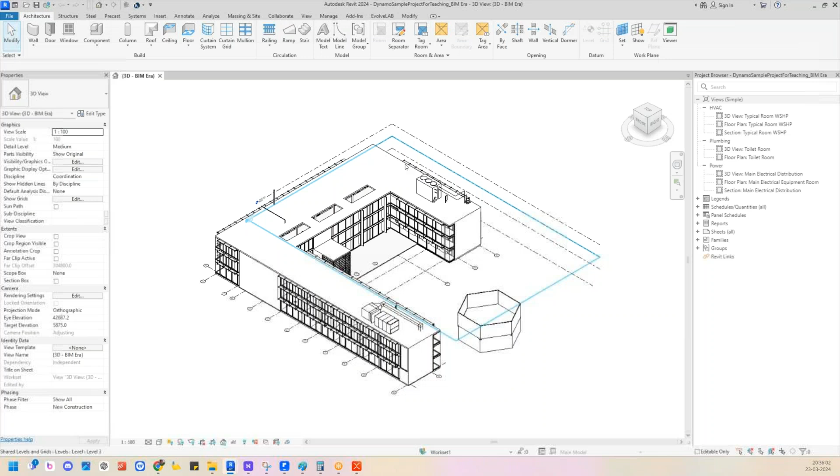Understand? So the first concept is called data types. What do you mean by data type? If I want to play with something—for example, this is a Dynamo interface, I hope everyone knows it. When I'm playing with a model, for example, if I have a line, let's say I have a line, I have a line here.

So I have some lines, 10 lines or 100 lines or 1,000 lines, which I have imported from AutoCAD, or someone, the engineer has drawn some lines on Revit itself, and you want to convert that into trays and ducts, taking that line as a reference. So you take this line as a reference, and convert it into the cable tray by giving some offset, drawing a duct next to it by leaving some space, like 150mm or 250mm or 300mm, depends.

So on the same cable tray, I want to create conduits. For example, I have a duct, and next to the duct, or down to the duct, I need pipes, whatever it is. So offset is a number. So if I want to create a duplicate, that is again a line, a line, a number.

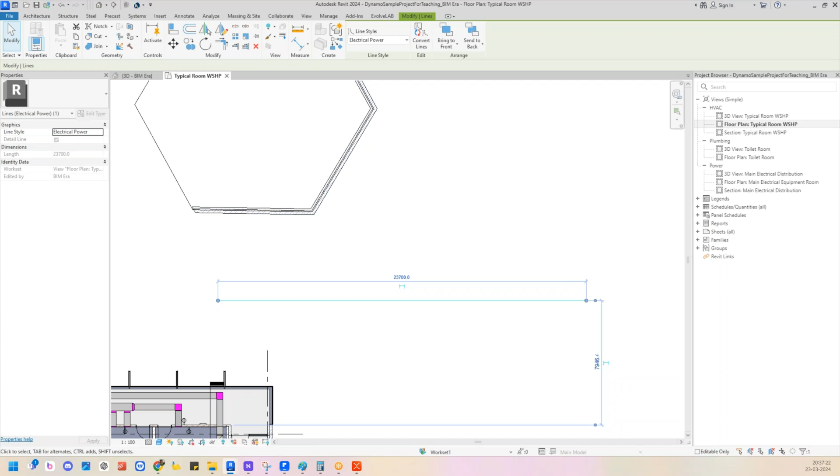If I want to control the wall properties, I want to control the height of a wall, I want to change the level of this particular wall, I want to change the cross section from vertical to slanted. So for every parameter, it has its own values. I want to change those values.

So from the beginning, from day one till the end of our training, and after the training, the way you implement, everything depends on the values. The value I want to play with, I want to play with this value, I want to play with this value.

I want to find out the walls which are slanted, with an angle of 45 degrees, or with an angle like 15 degrees. I want to see such walls in my model. How do you do that? So everything to create a task, to create an action, to play with an action, to extract some information, we need the data.

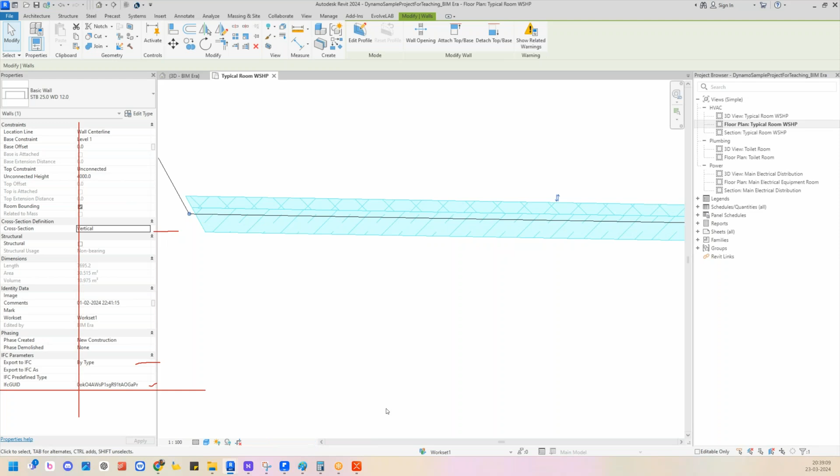Someone texted me a question just out of curiosity, which tool you're using for this mind map. This is Xmind. Xmind.

Vishak, can you see the screen now? I hope it's clear to you. Can you? No, I'm not still able to see the screen. You are not able to see. Hello? Let me share it again. I think it's my problem. Can you see the screen now? Just check. Not yet. I think it's my problem, there's a glitch on my side. Okay, do one thing, join from mobile as well. Join from the mobile. Yeah, I just rejoin. Okay, let's go. Okay, so yeah, I just have to rejoin.

Okay, great. So we have different data coming from different forms. Okay, so we will be calling that data types, and the types are in different ways. Let me show you.

The first one is like a number, and the second one is like a text, and the third one is like saying yes or no. Okay, if you have any questions, the data will nod its head, yes or no, yes no no no, yes or no.

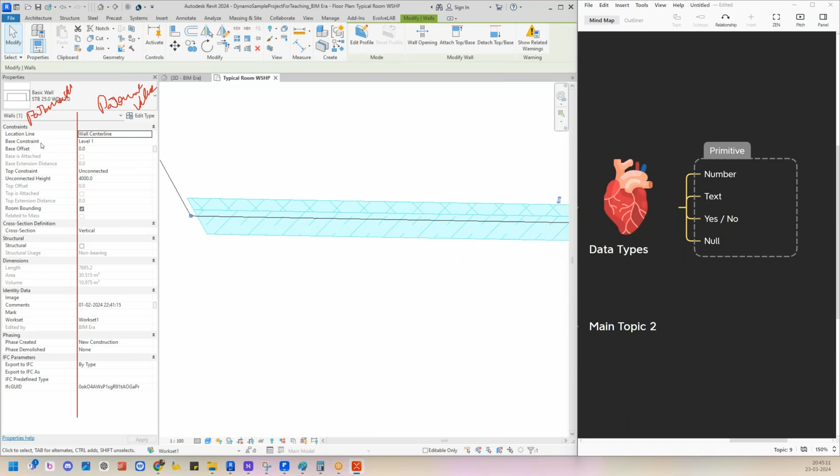So I'm having a cup. I can keep coffee in it, I can put coffee in it, I can put money in it, I can put some alcohol in it, whatever it is. So whatever you keep, different data types are considered. Here the location line is something different, base constraint is something different, and base offset is something different. So how do you understand it?

How do you understand that? Okay, just a second. I'm so sorry, okay, so let me see.

For example, if I want to control this wall height, let me change this number to 4,200. So I'm doing it manually. If you want to play with multiple walls, if you want to convert multiple walls, then I'll right click and select all instances.

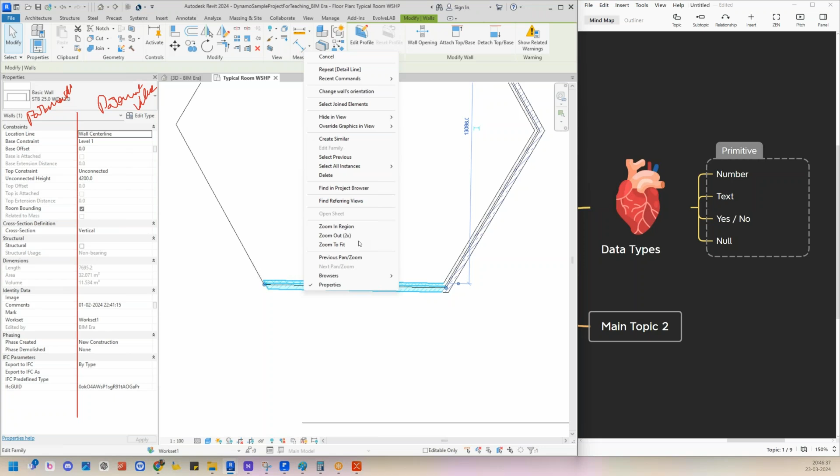If I want to play with visible in view, this is called a filter. You don't notice that, but that is called a filter. Even for this kind of filtering, we will be using Dynamo, and we'll filter whether you want me to change all the walls in a particular view or in the entire project. We can write filters. So whatever you're exactly doing, everything, these are like filters. We'll see that later, okay.

So select all instances visible in view. Now I want to change all this. Now I'm going to play with multiple walls. Okay, so here when I see the same, earlier it was like a number, but now it's showing like varies.

Now that is showing like varies. If a property keeps changing, I mean for example, I'm having three different values and the values are not the same, so it will act like varies. But if the content in the three numbers is exactly the same, then it results exactly the same.

Okay, so when it comes to data types, you must understand exactly what it's carrying and whether they are the same or not. If it's not the same, how do you assign different values? For example, I want to assign wall one data to this, wall two data to this, wall three data to this, how will it be? So the sequence, you have to change the sequence. No, I don't want to change the sequence, I want to keep the same value for all three walls.

Let's make it 4,200. So I'll select here and let's say 4,200. Now for this property, for this element, it's the same data, and I could see the data here. You can check that, for example, if you're on a wrong workset, you can find it out very easily and Dynamo will give you a pop-up.

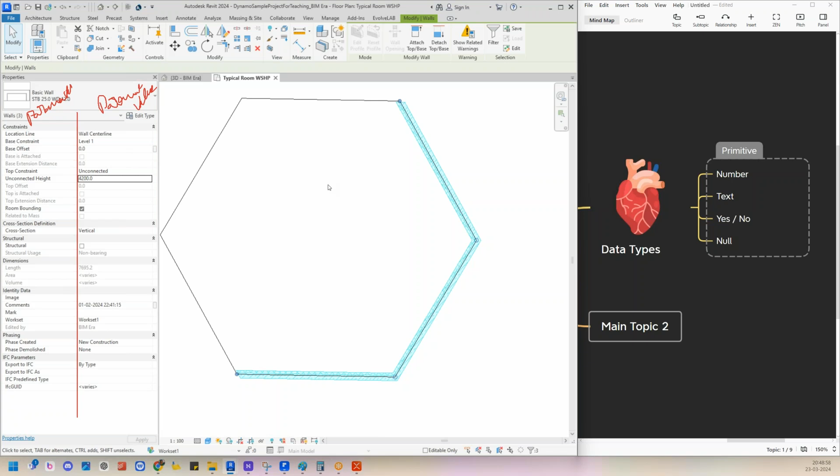Okay, so you will be writing some sort of actions. Simple. To understand every single thing, the data type is a key point for it. Okay, let me explain. Let's start giving some examples. Let's start playing, okay.

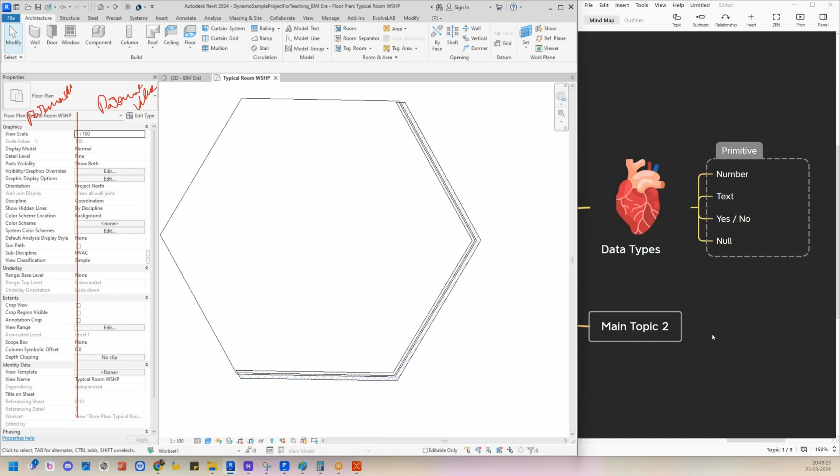We have a number, we have a text, we have yes/no, and we have a null. What are all these exactly? I hope you are aware of what number means and what text means. Number in the sense like 1, 2, 3, 4, 5, 6, 7, 8, and there's another property belonging to the number: it's like 1, 2, 3, 4.5678. So there is a difference between these two - it's the decimal.

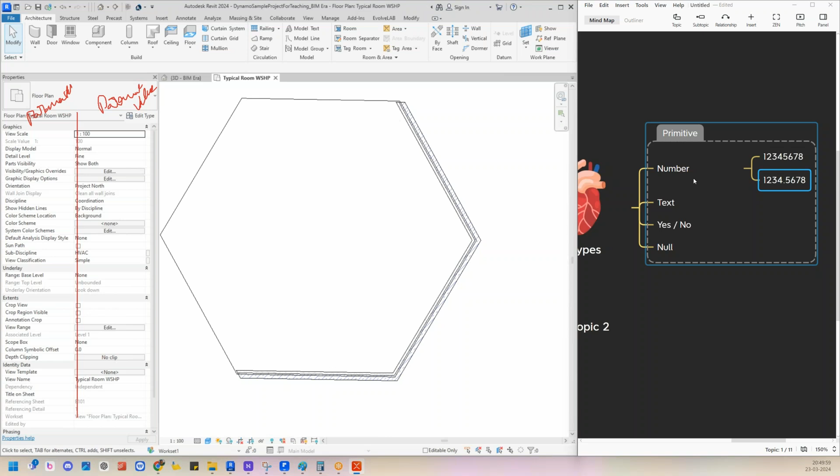In the second property, we have a decimal, and in the first property, we don't have decimals. So if you have 1, 2, 3, 4.5678, if you have a decimal, we'll call it a double. If you don't have a decimal, we'll call it an integer.

Now I want you to see the data very clearly, because eye detail is very important. You're not playing with any coding part or nothing, but still, to step into the coding level, I want you to be very good in reading the data, whether it is a number or a string.

Okay, let me show you some. Let me ask you a question, and you can use the chat box to reply with your answers. Let me select this wall. Now tell me, what is the data type of unconnected height?

Not a number, I'm checking. It's not a number, very clear. Double, double. Integer, double - I've told you very clearly. If you have seen a dot, I mean the decimal value - see, there is a dot here. If there is a decimal value, then it must be a double.

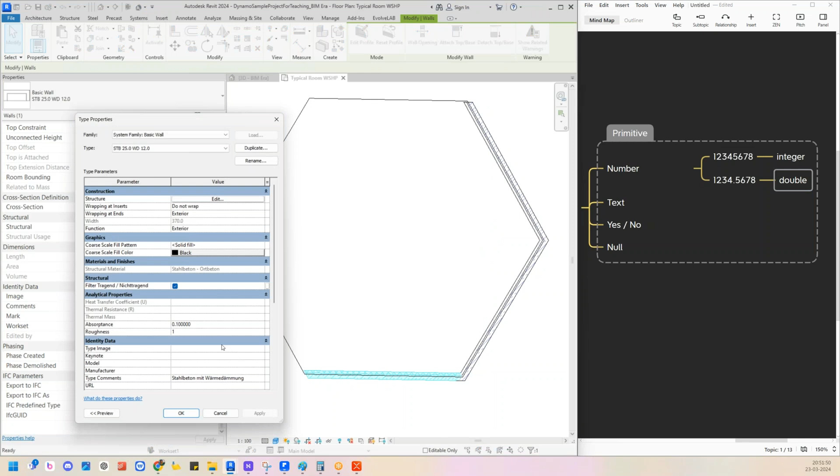If there is no dot... let's say, okay, we don't have any such examples here. Let's just go and check in the edit type properties. What about the roughness? What is the data type of the roughness? Integer, because it doesn't have decimal values.

What about the data type of absorptance? 0.1000 - it's a double because it is having a double, I mean it is having a decimal value. So it has a dot, 0.1000.

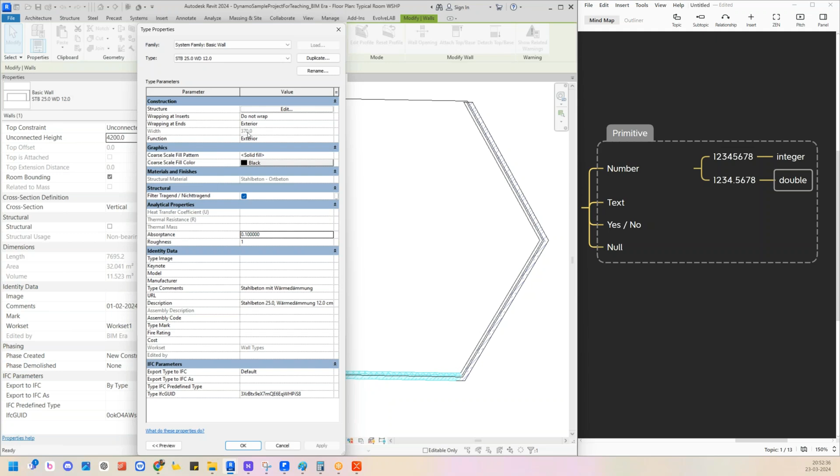Okay cool, what is the data type of the width parameter? Width parameter - again, it is double. Cool, so it's a double.

Okay perfect, so what about the length parameter? Length parameter, length parameter - it's a double again. 7695.2. Now you understand what is a double and what is an integer.

Very simple, so you cleared like 1% out of the entire training. You started understanding the data type, whether it is an integer or a double. Don't pronounce it as a number from now onwards. You have to remember this too: one is an integer, second one is a double. Integer without decimal values, double with decimal values. DND - double decimal, DND. So if you have seen something with decimal values, consider it as a double.

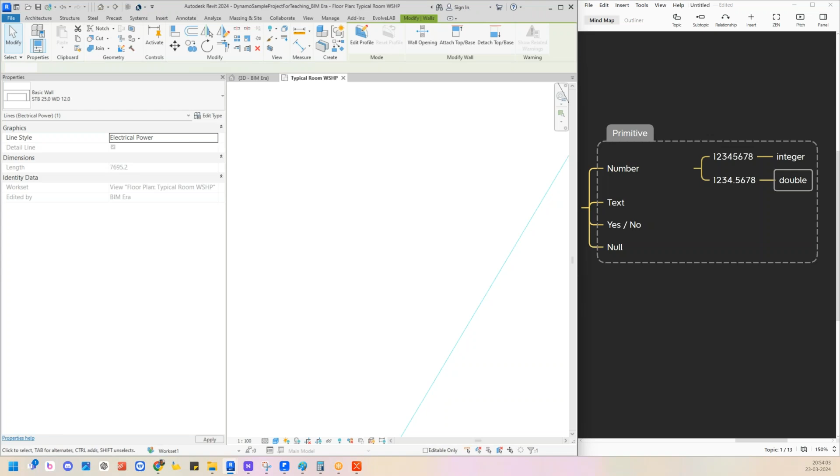Okay, let me see. If I enter, let's say, mark value - I want to assign mark values for this, like wall 1, wall 2, because I'm having a number of walls, so I want to name every single wall. I'm doing it manually. Most guys are doing the same for assigning values manually for lighting fixtures, like fire alarm devices or heat detectors or smoke detectors. They'll just give a manual entry.

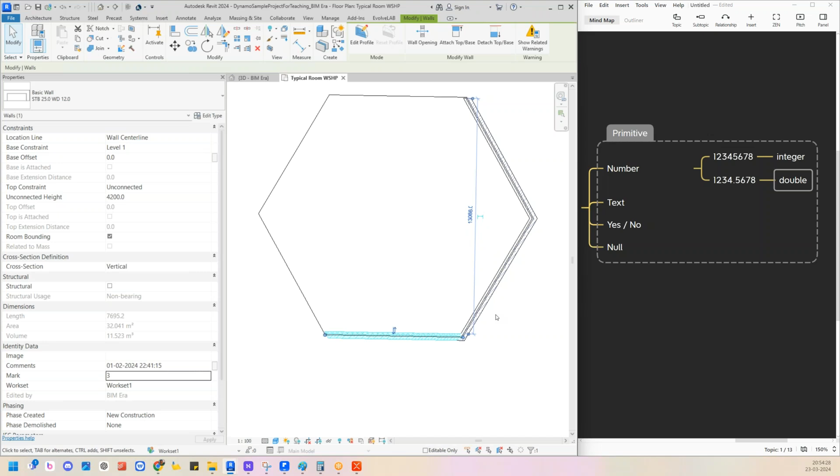Okay, so now just tell me, what is the parameter type of this? The mark parameter - what is the data type of this mark parameter?

Integer, integer, integer - most of you got confused here. If you see a number in a parameter, you decide it's an integer. I'm not trying to confuse you, just giving you clarity. If you see a value in a parameter, you shouldn't just assume it's an integer - you can't count it as integer, double, or text. It could be anything. There are different data types which accept integers, doubles, and text.

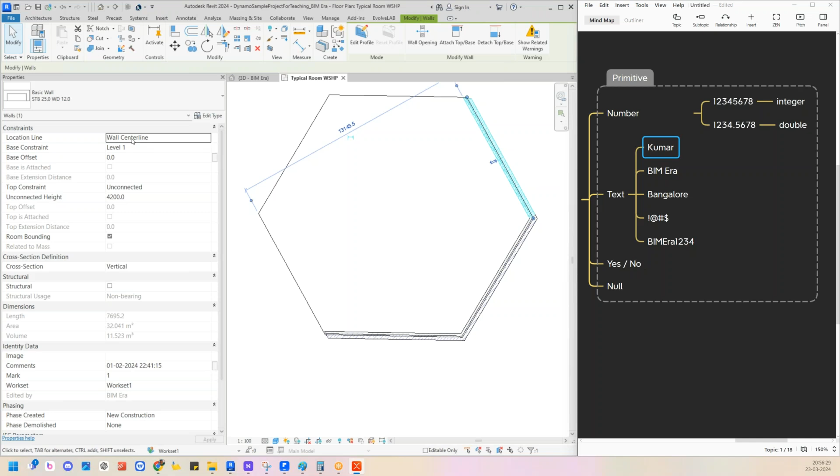Let me show you. What is the data type of this location line? Text - in the sense, like my name, Kumar or BIM Era, Bangalore. This is text. And special characters too, like a text with special characters like BIMEra1234 - this has alphanumeric content, alphabets and numbers both stored. So when I see something like 'level one', this is alphanumeric.

So alphanumeric can be called text, but I don't want you to call this text anymore. Call this a string. These are strings. Don't pronounce it as number or text - just call it either integer, double, or string. Make this a habit in a day or two.

So integer, double, string. What is the data type of this location line? Tell me. String. Good. So what is the data type of the base constraint? String again. What about top constraint? String again. Okay, good. Cross section? String again, good.

So what about comments? We have numbers only, we don't have any text in this. Double? But we don't have any decimals here, so how can we consider it a double? We have special characters, we have numbers. I have a doubt here - even I'm having a doubt. Let's see that later.

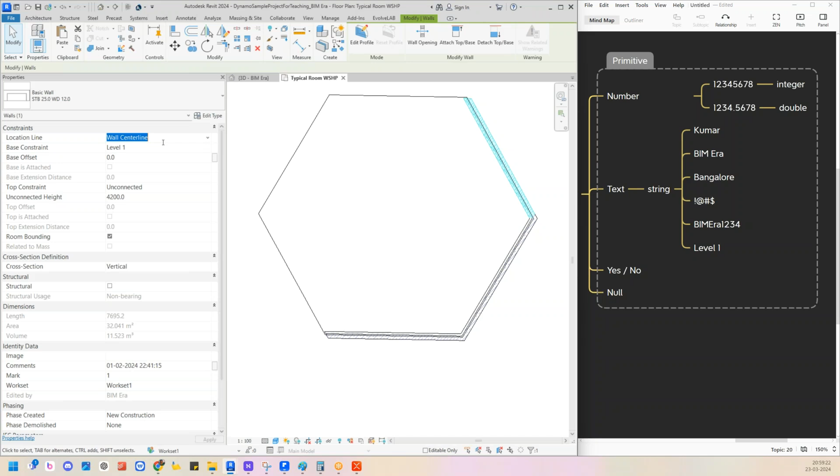Let me explain very clearly. Top constraint is not a string. Unconnected height is a double. Location line is not a string, neither is this, nor this - it looks like text. The face is different, but the backend is different - we have two things, the front end and back end. The front end looks easy to understand, but if you don't understand the back end, you can't play with the front end. This is common with developers - you should understand what is behind something.

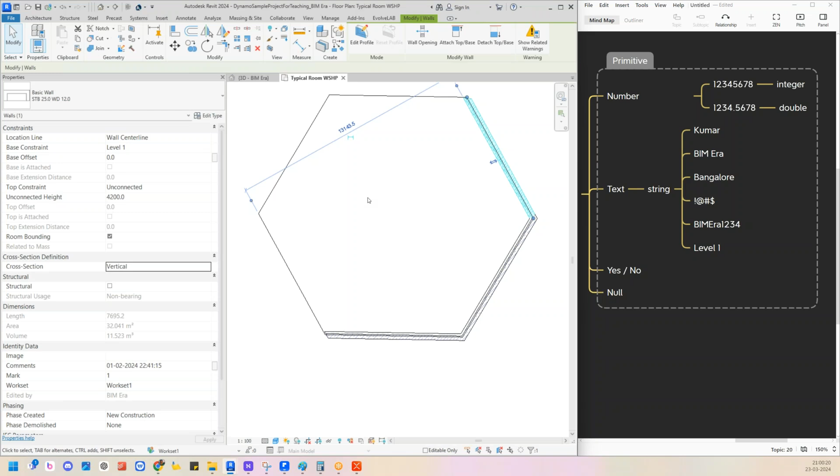So how do I know that, Rajesh? Can you give me an explanation? That we're going to cover in the 3-day training, don't worry. Maybe tomorrow, on day two, I'll cover how you understand the original data type. Today we just covered what are the data types and where we exactly use these data types. Let me show you some examples of where we use these data types.

Where do we use them exactly? For example, if I want to adjust a room temperature - adjusting room temperatures - tell me, what would be the data type?

I want to control a room temperature. What would be the data type? Very good, double.

I want to rename the floors. Listen to my questions very clearly - renaming the floors with some prefix. Very good, renaming floors with some prefix. It is a string. Superb.

So I want to count windows on a facade. Very good, counting windows on a facade. Why is it not a double?

Why would you say it's integer? Because we can't count windows like 1.3, 1.5, 1.7. So it would be a unique whole number, correct? Like 1, 2, 3, 4, or 20, 30, 50 like that. Very good, so that is integer.

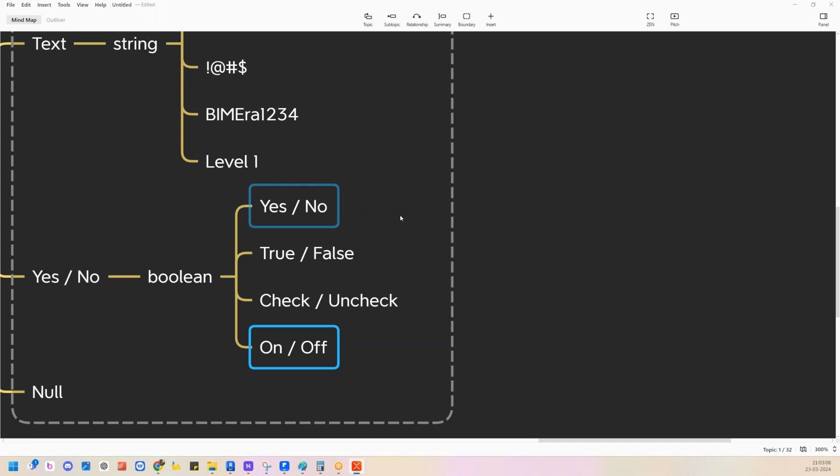Let me remove this 1 and 0 for now, I don't want to confuse you. So yes or no, true or false? Yes, it's true. No, no, no, it's false. Check - like a checkbox, not check or uncheck. It's like a checkbox, say binary.

When I select this, do you see that? What is the data type of this room bounding? Boolean, correct. So what is the data type of base is attached? It's a boolean again. Correct. What about the structural? Boolean again.

So we can see only the checkbox, and somewhere we can see drop downs with only two values. You can consider that as booleans as well. Even if you have a list of values, if you have more than two values, we can't consider that as a boolean. Even though it is a list, it must have only two values to play with.

So now you are clear on this part. Now let me give you another example.

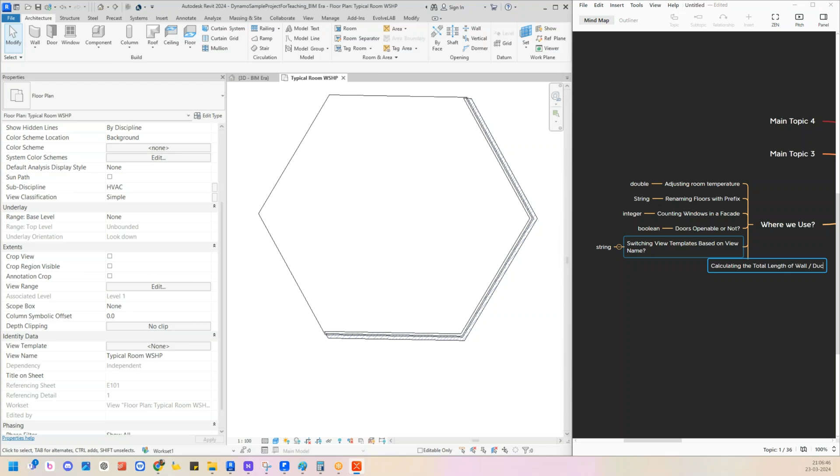Like if I want to play with switching view templates based on view name, if I want to change it, then it's like a string. Calculating the total length of the wall or the ducts or the railings - calculating total length of a wall or a duct or tray. We don't get whole numbers there, we'll have some differentiation, correct? So that would be like a double. It's not exactly like 1, 2, 3, 4, 6, or 600 meters - it's like 600 meters with a point something. So that would be a double.

So now you've started understanding where we generally play with these data types. Not only these, we also have geometrical data types. I'm not going to take it deeper into geometry for now since it's a very new concept, but I want you to understand the data types.

From now, don't store these examples in your mind - you don't need to consider them right now. I don't want to scare you, but I want to explain there are some other data types related to geometry. These are project related for the time being, and there are a few more project related ones.

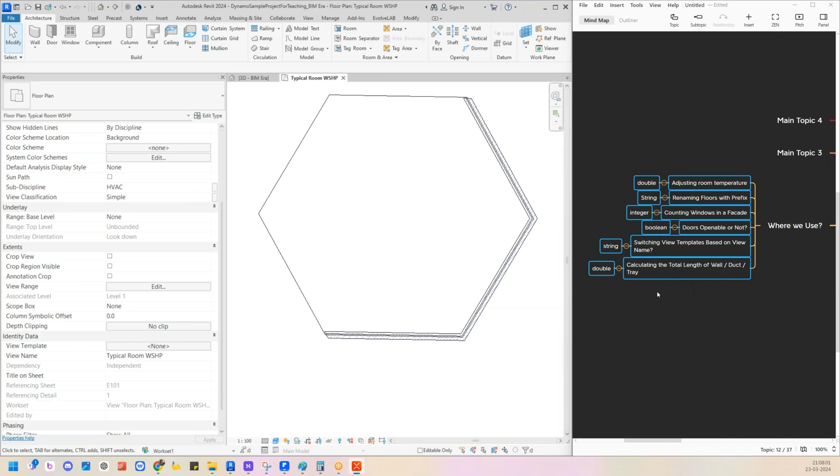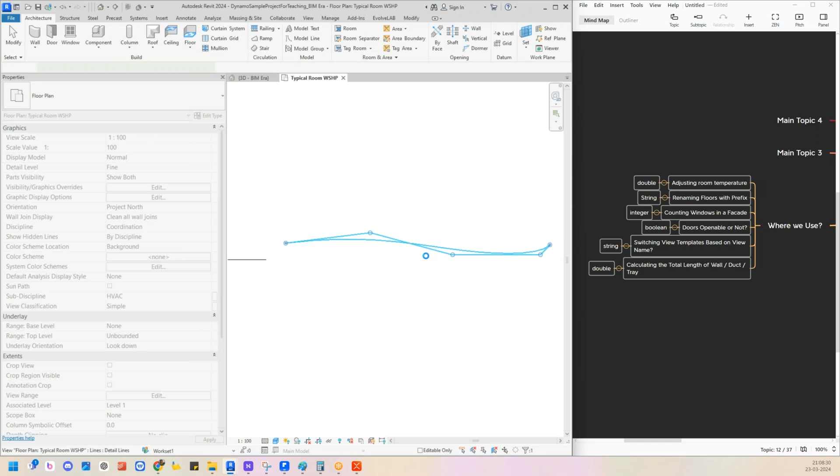We generally call it elements and element IDs. For example, let's say I have a detail line, a DL - not in the sense of a driving license. So I have a detail line. I want to consider this as a reference and draw a tunnel or a road. Let's say I copy it here, with some 10 feet or 20 feet or 40 feet or 80 feet spacing.

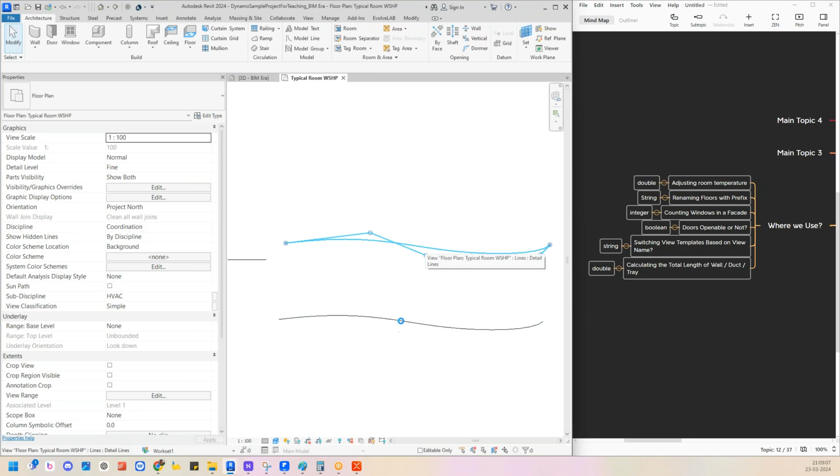So I want to create a road, but I don't have any other inputs except this. I want to take this as a reference and create a duplicate. To create a duplicate, I need to know what kind of data type it is. The data type is a curve. So curve is a data type again.

Now I'm having a curve, and I want to place the lighting poles with 2 meter distance or 4 meter distance. So to place that, what do I need generally? Elements, correct. So in the geometrical perspective, I'm having a curve - this is the path - and I want to place one pole here.

I want to place another pole here, another pole here, and another pole here. So what do I need to exactly achieve my output? Still didn't get that?

Points - this is a point. XYZ point, XYZ points, correct. So we need points.

So to create points, we use this curve as a reference and create the points. How do we take this as a reference? Okay, I'm having already points.

So if you're a Civil 3D user and getting data from a Civil 3D Excel document, you can import that Excel document and convert it into geometry again in Revit. So how do you do that? It's like vice versa - if you can extract point information from a curve, you can create a curve from the same external point information. This can be done in reverse engineering, in reverse order. It can be done.

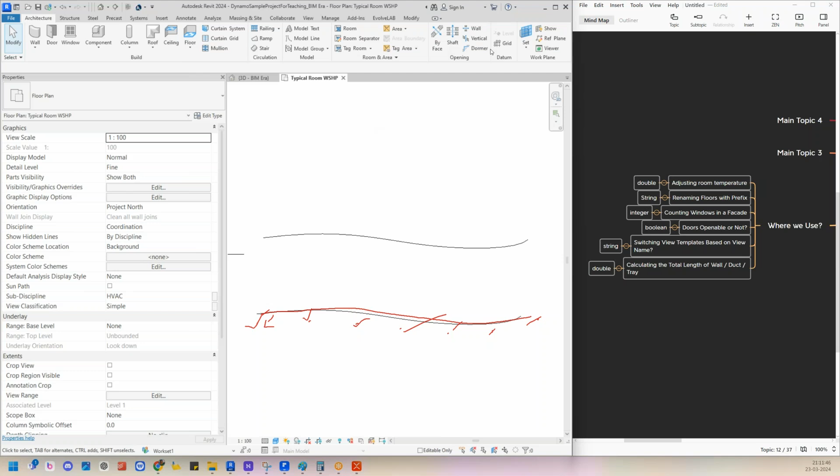Let me remove all this. I think I've shown these examples in our one and a half hour demo - I mean, this is a training, not a demo. So let me show you all these data types and how we read them, and let's start playing with those data types.

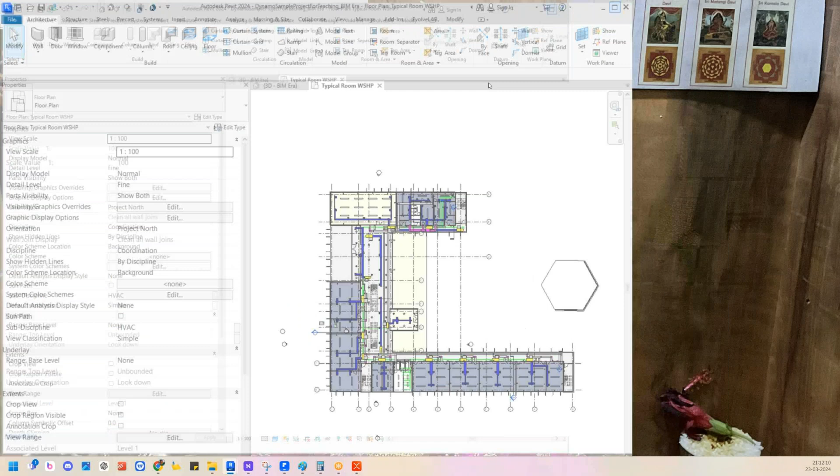Okay, I'll just open my Dynamo. This is my Dynamo, let me close this. I have this Dynamo in the Manage tab inside the ribbon, the visual programming panel. I have two things, Dynamo and the Dynamo Player. Don't open the player.

So there is a concept to convert a script into a player. I mean, this is for the non-Dynamo users. This is for the Dynamo users.

So when I just click on it, I can see an interface like this. I'm going to explain what this interface is, what are the things in it, what is this discussion forum, each and every single thing on the interface later, on the welcome screen.

So when I just click on new, don't get scared - I have too many blocks here, which we generally call packages or add-ons. I've installed these by doing research on whether the packages help me or not. If I have a task related to architecture, I need architectural add-ons, so I install those. If I have a mechanical project, I need mechanical add-ons, so I install those.

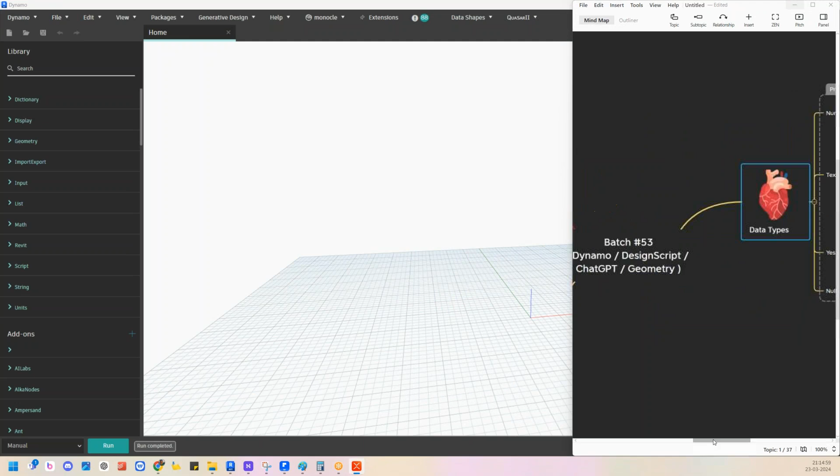General info - you need packages, you need add-ons or packages to play, but yes, of course, you have to install it.

And second one - node. We're just going to play with the nodes. What do you mean by node? No code, no code - because you're not going to code something. You're not going to code anything, but still you want to enjoy the coding experience. Someone has written a code for you, so you want to play with it.

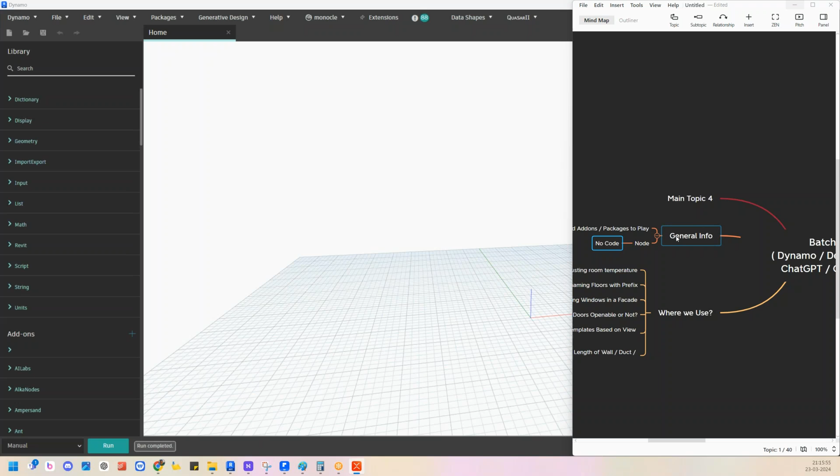You have to call it. So to call that, they have stored it with different names based on their own convenience. If a guy is bad in English, he has to struggle finding a node. If a guy is very good in English, he can easily find the nodes. I'm just kidding - it's not like good or bad in English. I'm just trying to convey you something.

Okay, so how do I search for that? For example, there are two common nodes which we are going to play with for data types. We generally call them twin nodes. The first one is 'get parameter value by name'. Because, you know why I drag this into the canvas?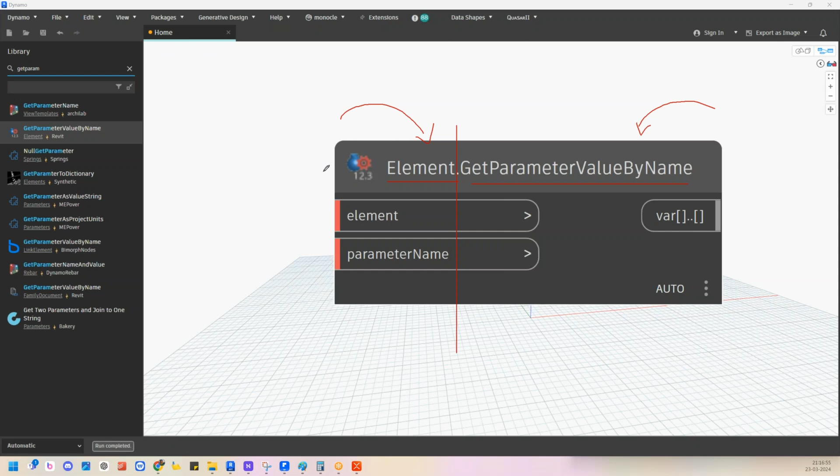For dragging this into the canvas, I want to check - I'm going to connect you the element, and I'm going to connect you the parameter name. So what exactly do you have to do? When I connect, see the one we're playing with here - it's clearly written in the beginning. So I am going to play with the element and I want you to do this action. I'm having an element and I want to do this.

If I want to play with points, then I'm going to play with the point and I want you to do this - point by coordinates. So 'by coordinates' is an action. I'm telling it to do this, and I'm going to play with this.

So there are two things, the common things you must notice on a node - the two areas. The first one is what you're going to play with - I'm going to play with a point, I'm going to play with a wall, I'm going to play with a work set, I'm going to play with a sheet. So the first one comes in the beginning before the dot, like a subject. After the dot comes the action.

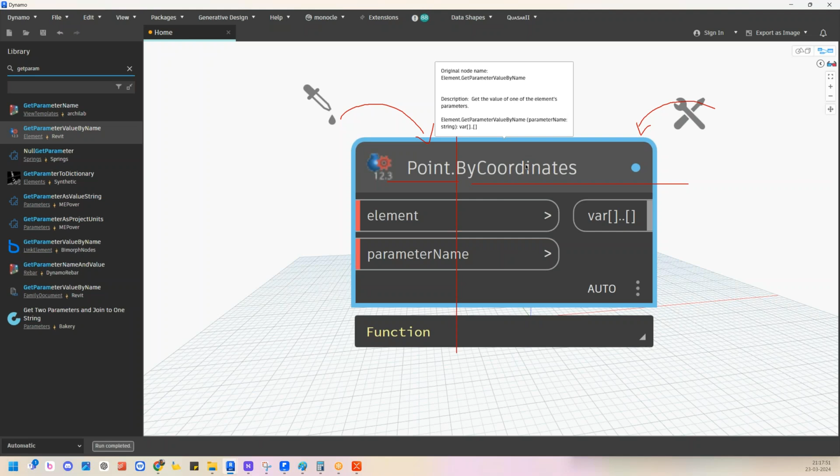What do you want me to do with it? I know you have a point. So what do you want me to do with that? So do this, okay, so do this. I want to delete this, the particular points.

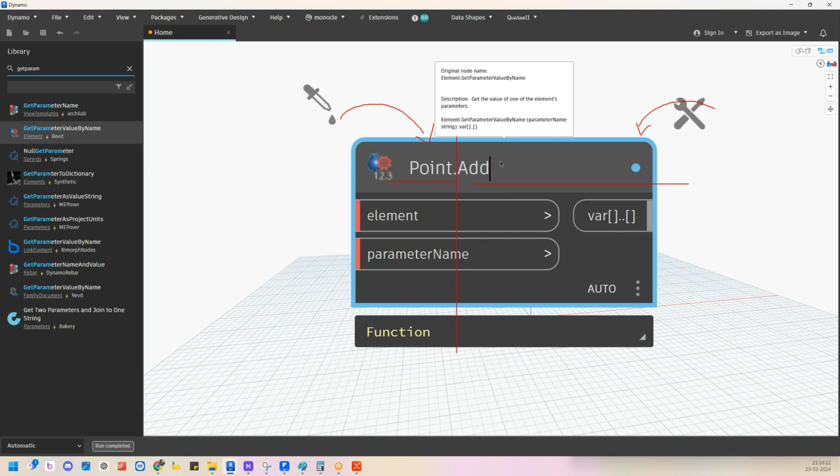I want you to move these points. Do you understand? I want you to add the point, the Z value or X value or Y value to something. Do you understand? So action, set of action. So this is an action part, and this is an element part.

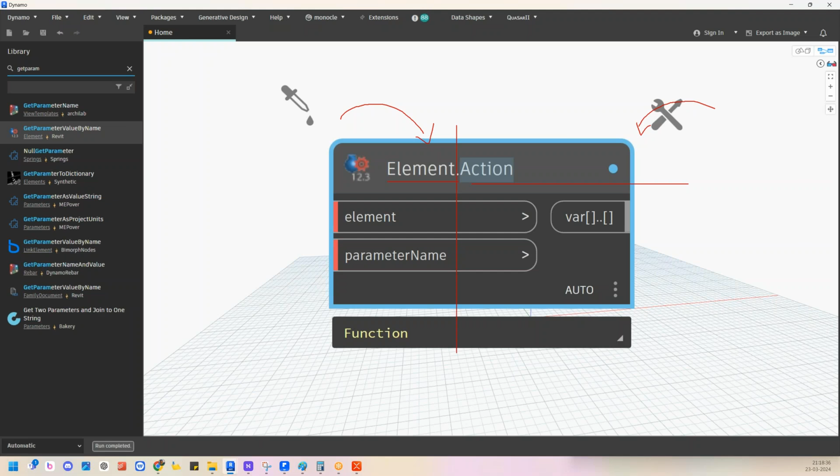In our general terms, we'll call it in a different way: object and subject. I don't want to explain that on day one up to that extent. So try to understand, I'm having an element and I want you to get the parameter value. I want to get the parameter value. But how? By parameter name.

I'm going to connect. So if you've seen the three different things, I'm having an element here, so I'm going to connect this element. I have a parameter name, I'm going to connect your parameter name. So can you please get the parameter value out of it? Can you please get the parameter value if I connect the parameter name and connect element to you? Ah, sure, I'll do that.

So that's what the internal functions have written. So the first one, it is expecting an element. So don't try to understand it more deeply, it's very simple. So what it is exactly expecting.

So you should know how to ask it. Very simple, okay, select model element. Select model element, okay, let me just click on select. This is a button, so when I just click on the button, it will, see, in Revit,

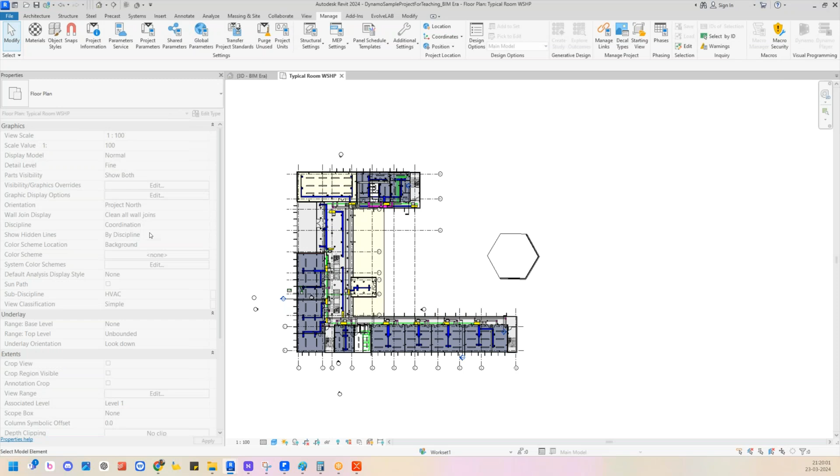the properties palette got grayed out. So I don't have any controls to play with anything here. So let me select an element. Let me select one element. Let's say I'll use this duct, I'll select this duct. Selected.

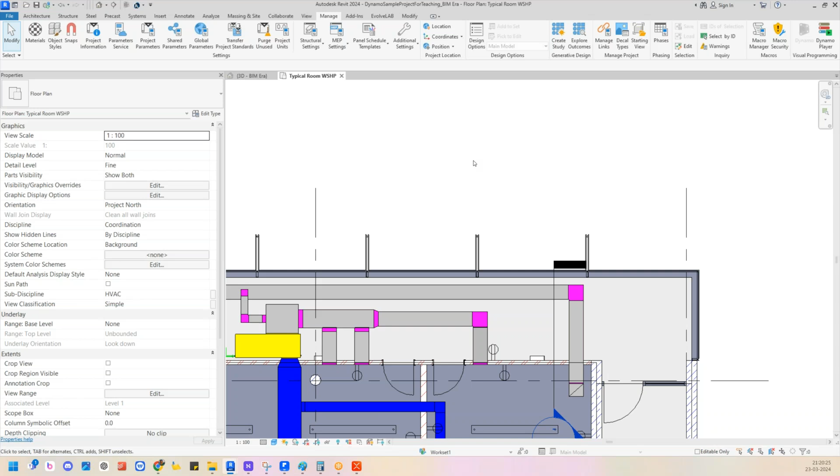Now the properties palette comes back again to its original state. So it was in a freeze state before, but now it's active again. If I come back, what it is exactly saying, yeah, you have selected a duct, man. Very good, I have selected it.

So now when I connect this element to the element, the second thing you have to understand very clearly is the connections. On every node we have two parts again. Let me note it down here. General info: we have two parts on every node. The first one is element dot action.

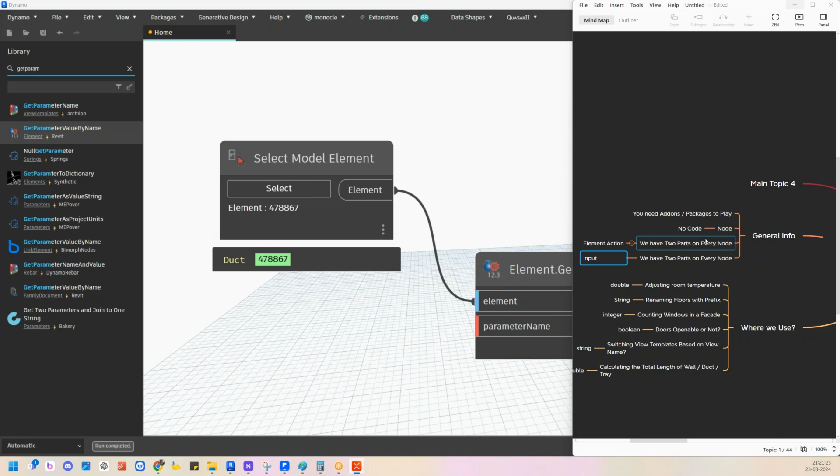At the same time, again, we have control C, control V: the next one, which is like input and output. So I want to cut this into two parts. So cut this into the two parts. The left hand side we'll call the input and the right hand side we'll call the output.

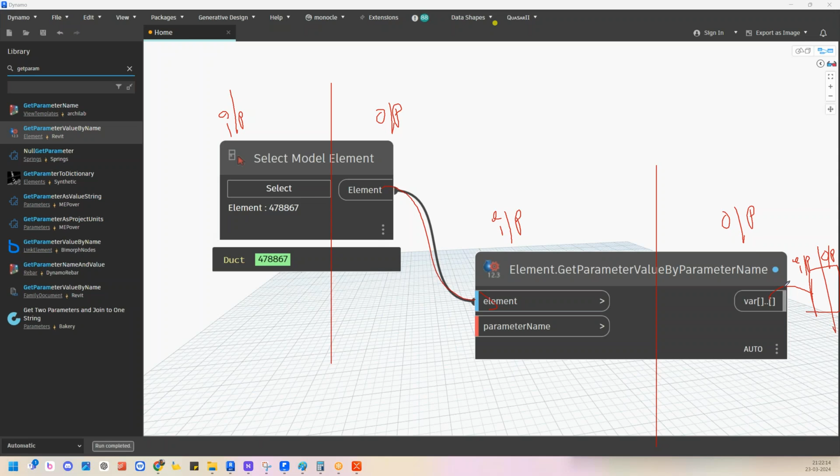So the output of the first node must exactly match with the input of the second node. Output of the second node must match exactly with the input of the third node. Input of the third node should exactly match. Do you understand? So this is another ground rule. You must make this, you have to learn it by heart.

Generally you don't need to memorize it, this is very simple: output should exactly match with an input, with the connecting nodes. As simple as that. Now this is expecting an element, so I have connected an element. So next time this is expecting a parameter name.

Let me check parameter name. Parameter name, so parameter name, I don't have anything as a parameter name. But this is expecting an element, so I connect an element to it. But on the second one, that is saying like parameter name, but I don't have any nodes with the name of parameter name or anything, so parameter dot name, but I don't know how to connect this to this.

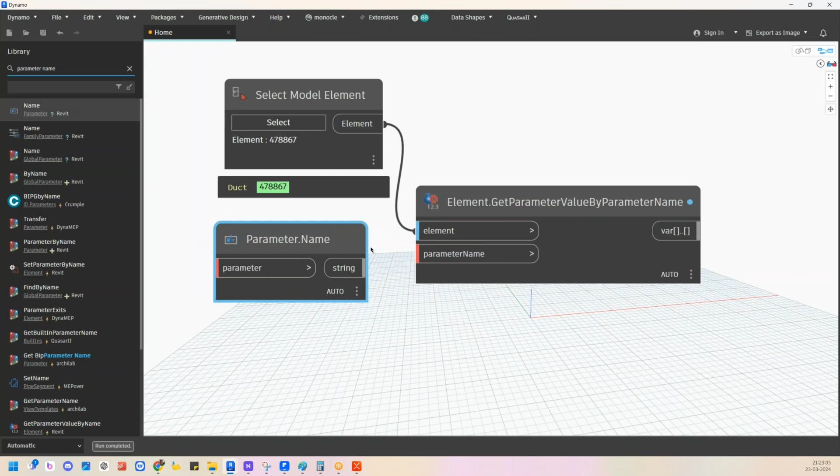Very simple: in such cases, if you can't understand exactly the parameter name, hover the cursor on it. Hover the cursor on it. On every node, you will be having at least one. There are common hints, like three different hints.

There are three common hints. It must be there, but it's not exactly the same. You can find the three hints on every node. Sometimes you may see two, sometimes one, sometimes none at all. If you don't see anything, you'll have some challenge understanding what it is exactly expecting - what should I connect? How should I connect this? You'll waste a lot of time there, because finding the node is different, and connecting what it is exactly expecting is very different.

While you're on this road, it's like you have to impress someone. You're a sales guy, you have to impress someone. If you want to talk to a person, you should go into his perspective, and only then can you sell a product. If you want to impress a kid in a mall or somewhere, you have to act like a kid. Do you understand? So while you're trying to connect something, you must try to understand what it is really expecting.

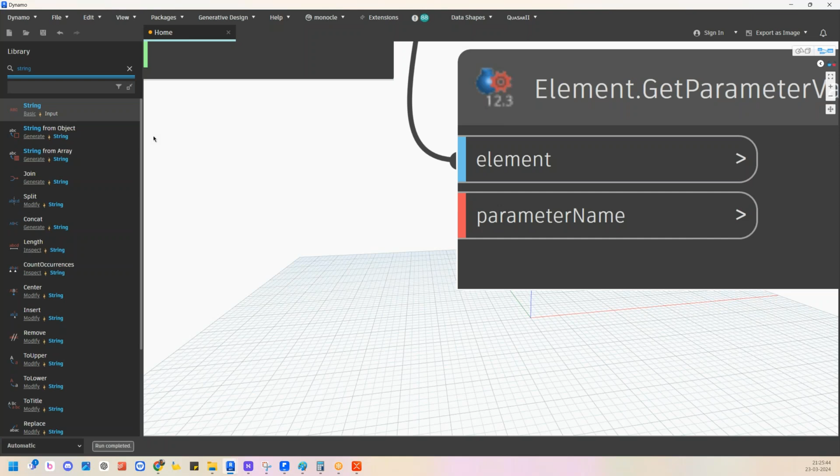But here in our case, we're having two. The first one is the name of the parameter whose value you want to obtain - it's trying to explain in a sentence. But if you're bad at reading and don't understand the technical terms, you have another option - going with the second one, it says string. Oh my goodness, so it's expecting a string. Let's type a string. Very simple, so place it.

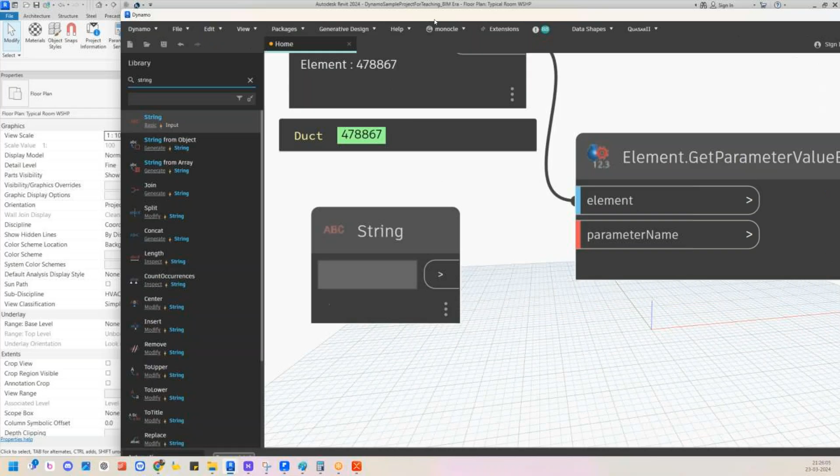That's it, halfway done. Now the second challenge - but what about the rest of the 50%? You're on the track, but what to connect exactly? Parameter name, okay fine, so you're asking parameter name. For this duct that I've selected, let me choose one parameter. I'll pick initially, I'll play with upper end top elevation.

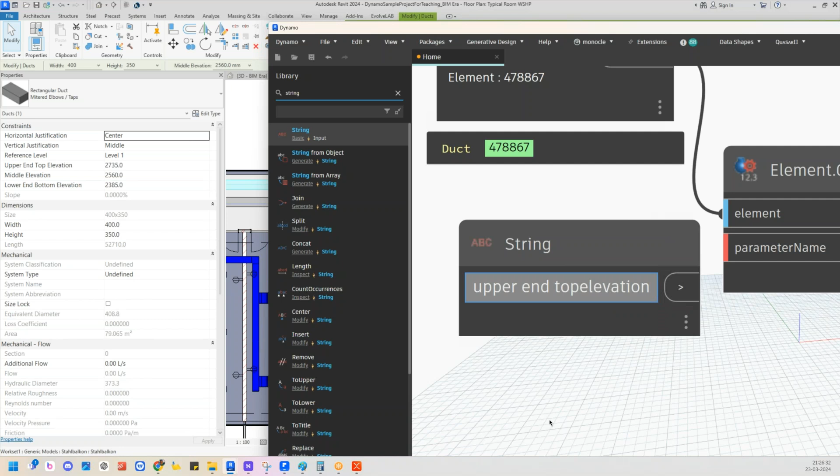So when I connect this to this, it's supposed to print 2735, but it's not printing anything. Why? It must print, right? But why isn't it printing? Exact text, huh? So you want me to connect the exact text, is it? So what do you mean by exact text?

Exact text - upper end, okay, there is a space. Okay cool, still it's not returning the output. Space after top, okay, but still - top elevation, top elevation, but still it's the same, no? I can't see the output. Can you help me out here?

Exact formatting - case, which case? Suitcase? Which case, capital letter? You didn't - ah okay, but you want me to change to upper case, huh? So upper capital U and capital E, capital E and capital T and capital E. Cool, yeah, now I got the value.

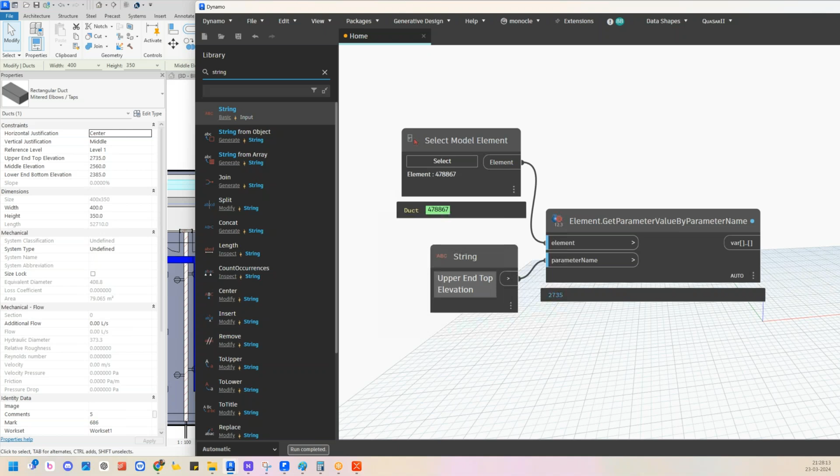Okay, so 2735. So the challenge is how do you exactly connect to it? This is case sensitive - it's a matter of case sensitivity. So whatever the parameter is, exactly what the parameter name is, you have to exactly connect the same to it. Okay, so 2735, that's perfect now.

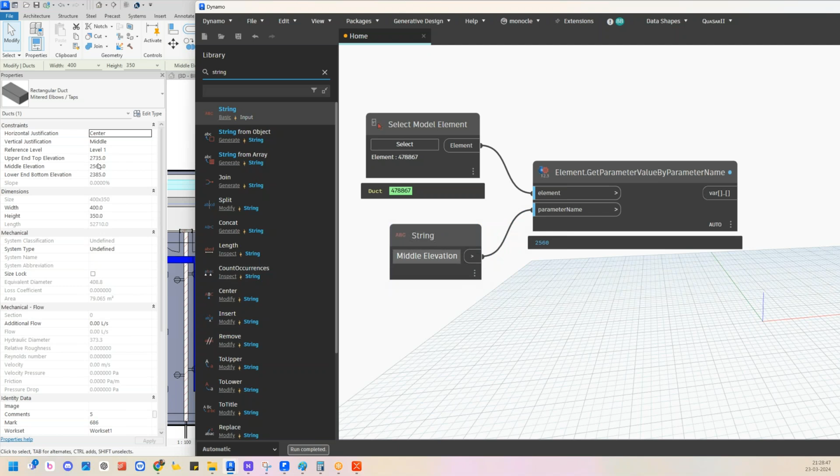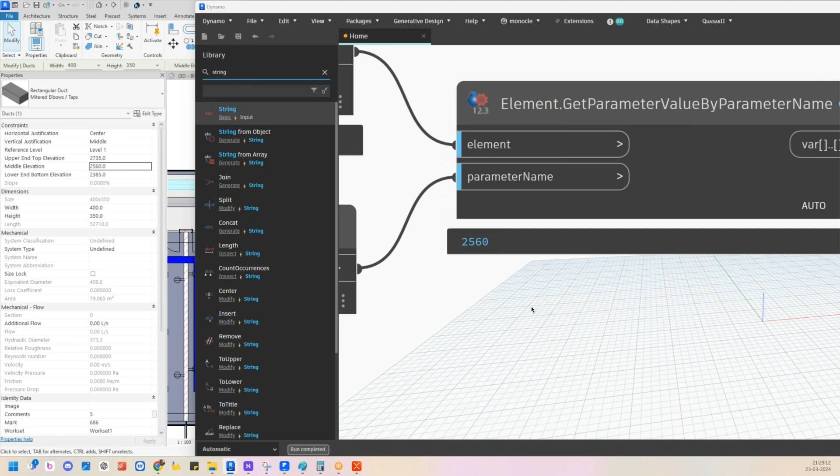We have it - what is the storage type of this? What is the data type of this 2560 - integer or a double? Integer or a double? Integer. But here it is 2560, it's a double - you told me that it's a double, but here I don't have decimal values. So which is the right, correct data type? Which one should I consider - which is written in Revit, or which is extracted from Dynamo? Which one should I consider - the Revit one or the Dynamo one?

Revit, huh? But we are playing with Dynamo, right? Why should I consider the Revit one? But still, you have to consider the Revit one only. Don't get confused, it's very simple logic.

So who is creating a parameter? You, or your manager, or your coordinator, someone. Correct? So while creating the parameters, the person who is going to decide whether it is an integer type, whether it is a double, or whether it is a boolean, or whether it is a text.

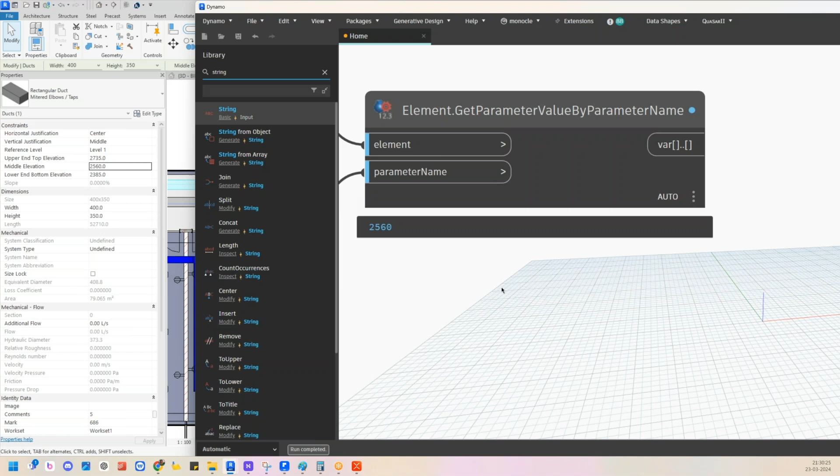Let me create the parameters for our understanding. Let me show you exactly how it is. Just go to Manage and Project Parameters. Okay, when I create a new parameter, the name parameter name. Let's say param underscore param underscore discipline. Let it be as the common, same data type.

I think you haven't noticed this before. There is a coding terminology on the Revit interface, it's data type. The same we are following now. So the data type: text, integer. Where is double? We don't have a double.

Rajesh, you told me integer. That's fine, you explained string, but instead of string I can see text, so I can consider this text as a string. Okay, that's fine, but where is the double here? But you see, we even have yes or no as well. And where is the double here?

See, there is a number. Rajesh, why is there a number again? Why is there an integer again? So the number will be considered as a double.

Let me create 4 different parameters and see how it exactly works. Let me create an integer first: param integer, under identity data. Let me select for everything and click OK.

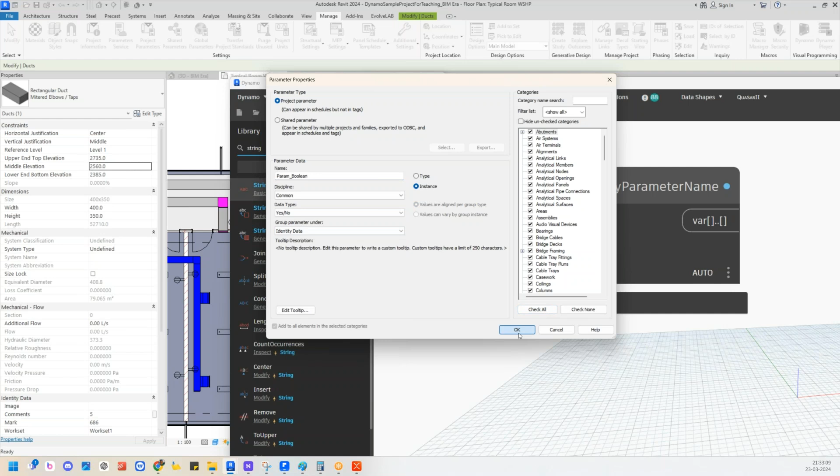Let me just create one more final one: param underscore boolean, and that is yes or no. Under identity data, for all the categories, let's click OK and click OK.

Now I want to play with these data types. Before we play with it, see, when I select the duct, what happens? I can see all the parameters: param boolean, param double, param integer, param string, and everything here.

Before we step into the Revit parameter properties, let me show you how exactly this data type works. So when this is a boolean, see, yes or no, it only enables and disables that check mark, and uncheck that. This is true and this is false.

If it's unchecked, it's false. If it's checked, it's true. So yes, no, on, off, true, false, check, uncheck, yes or no. Very clear, now that's fine.

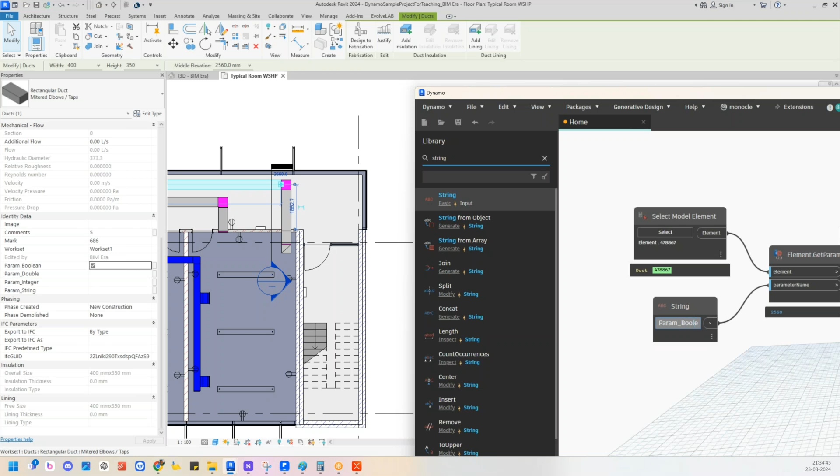So parameter double, now let me play with the boolean. Can you please get me what is there in the boolean? Param underscore boolean, exactly the same. Oh, it's showing me one. It's showing me one, why is it supposed to show like a true or false, but why is it showing like one here?

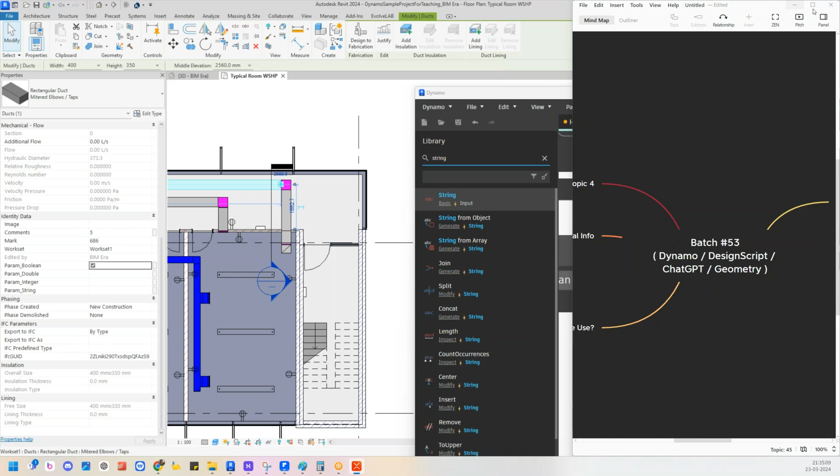That is the reason I mentioned. If it is a true part, it will be one. And if it is a false part, it will be like a zero, zero in the sense nothing, it's not there. If I change the value, if I uncheck that, what happens? It will show zero. It will show you it as a 0.

Okay, cool. Now let me play with the double. When I enter 1, 2, 3, 4, it is adding the decimal values by default, adding the decimal values by itself. Okay, now let me play with...

the Dynamo double. It's printing 1, 2, 3, 4. It looks like 1, 2, 3, 4, but that's fine, but still that is a double data type. So you have to consider the Revit one, not the Dynamo one. So what if I change this value to 567890?

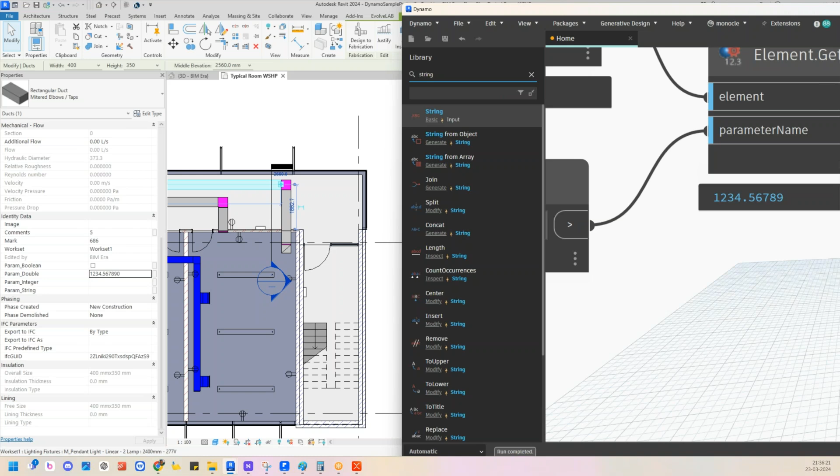Okay, clear. So now what if integer? I want to play with an integer now. 1234.567890 - when I hit enter, it's giving me a pop-up: enter an integer. I hope you've seen this before while playing with parameters. There's a coding terminology popping out saying enter an integer. So you have to enter an integer only.

Okay, but let me enter 1234.000000. It is accepting now. So even though I entered it with the decimal value with the zeros, it is accepting it because it will be considered - it will round that off and give you the final value.

What if I change this to the double, 000001? Now if I ask the double, see it's printing exactly the same. But it won't happen exactly with an integer because it will not allow you anymore. If you're trying to enter a decimal value in the integer parameter, no, you cannot. I'll show you how to play with this in Dynamo as well.

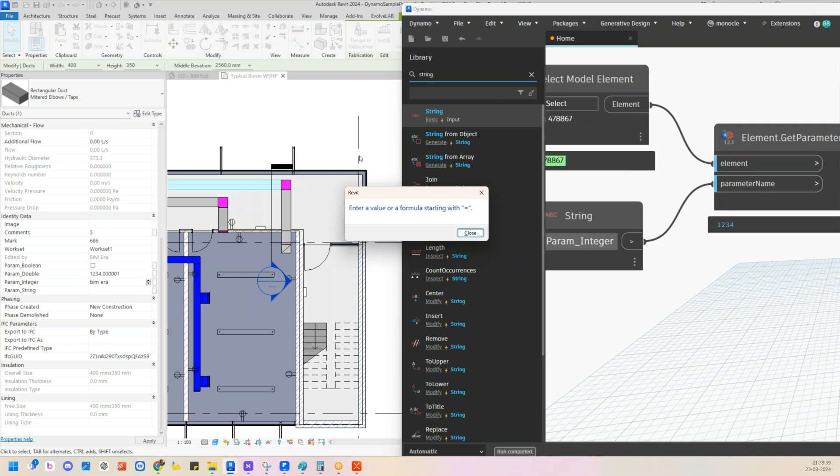Let's see whether integer will accept numbers - I'm sorry, a text. bim era, please accept. See, still it's saying the same thing. So an integer or a double will not allow you to enter any other data type in it, like a string or element or a wall or a curve or a point. It will not allow any such data types into another data type.

Not only this, any other - for example, if there is a parameter which stores a curve, when you're trying to enter a string in it, no, it won't accept that.

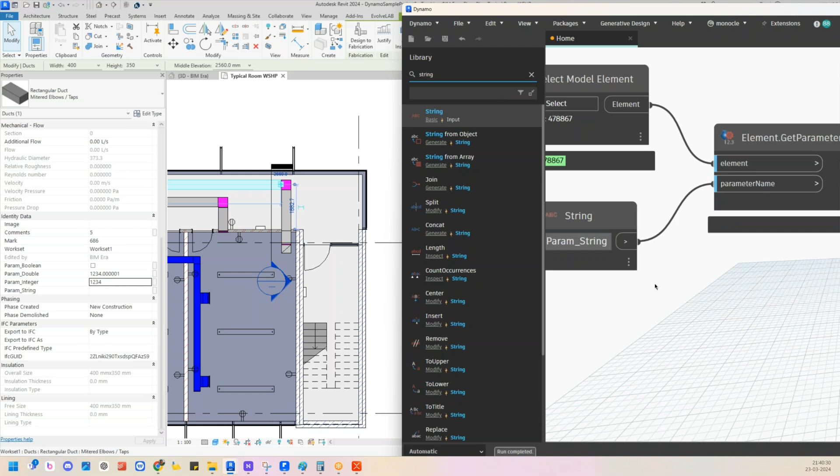So parameter dot string - let me type parameter underscore string. Now there is nothing, so it's not printing anything. This time if I type 'bim era', yeah, it's printing - it has printed 'bim era'. Okay, fine. What if I type 1234? It's 1234. Very good, because I think it is accepting the numbers as well.

What if I enter 1234.56789? Same, it is accepting everything. Okay, what if I type 'bim era 1234'? So the text can accept a string. This parameter underscore string - the string can accept even the alphabetic and the numeric as well.

Okay, both. What about the special characters? Even the special characters will be considered, like hyphen or at the rate something, at 15678, or any special characters - if you just hit enter, I can see the same exactly here. So the string can store anything in it. Whatever you pour, it won't object anymore. It keeps giving you what you've connected, exactly what it was there - it will print exactly the same. So it will allow you to store whatever you want in it.

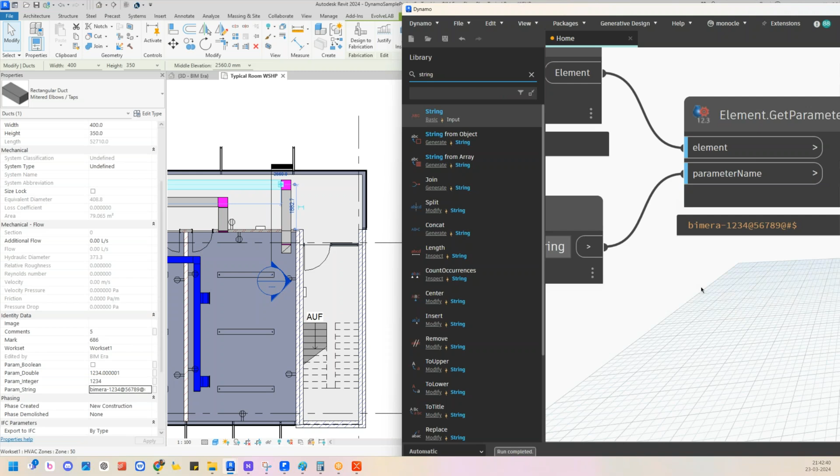Okay, but not exactly like other data types. You can't store a point in a string. You cannot connect a point, you cannot connect a level, you cannot connect something to a string again. Now you have seen how do you read it, but let me show you how do you play with it. I want to set some values to the respective parameters.

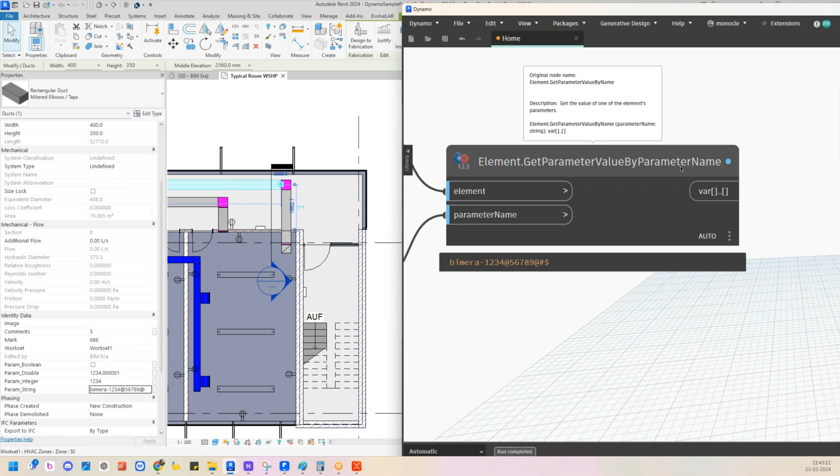I told you there are two different nodes, twin nodes. One is a get parameter value by parameter name - actually it's element get parameter value by parameter name. So for your understanding, I just added a parameter here, simple. Then there's set parameter by name. I have an element, can you please set the parameter value by parameter name? So if you can read it clearly, even though the text is missing, if you can read it by yourself, that would be good.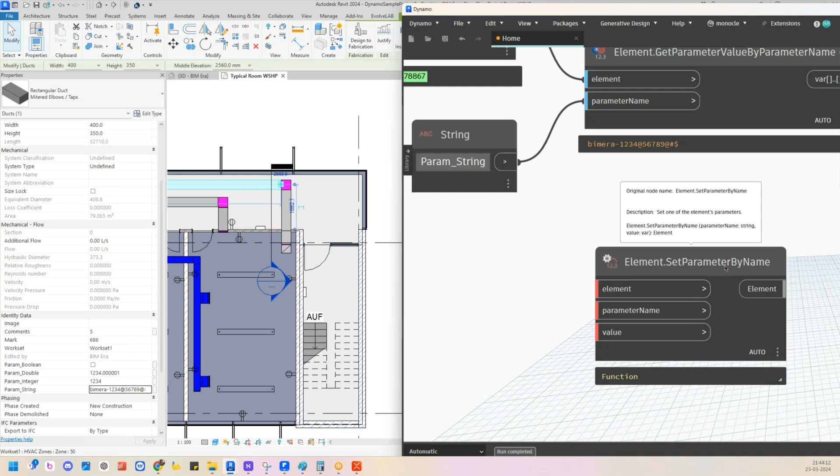You will experience that in a very less time, don't worry. It will be very easy to understand, based on the inputs you can read the node names. Seriously, you can see them exactly. Don't consider the same node name that you have here - you will start reading the node name the way you like, based on the inputs. You have to understand the inputs, and once you understand the inputs, you can read the node.

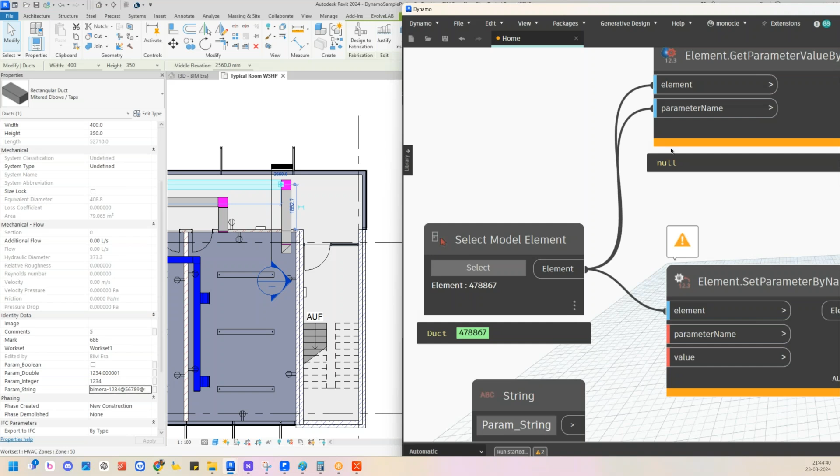Okay fine, so this is expecting an element. I'm not going to play with this node now, so I've disconnected the connections. Of course I can use the same connections again and again - for example, I have taken here and I can take a number of connections from the same, an n number of connections again. But I don't want to do that, I don't want to confuse you. So it is expecting an element, and I have connected an element to this.

Now I want to set - the duct is already selected here, and this is a parameter name, to the parameter integer, to the parameter underscore integer. The first one is a boolean - no, let me play with a boolean.

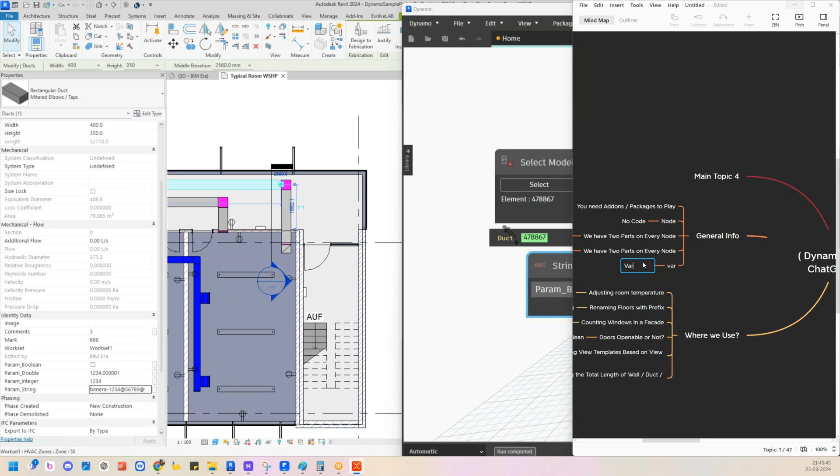To play with the boolean, let me connect. I'm going to connect the parameter value. But what about the value? When I hover the cursor on this, it is saying that the value in the second line, var, in the sense varies - it's not a variable, it's saying it's varies, it's keep on changing depends upon the parameter you connect. So var in the sense varies, let me add that here. In the sense, the data type may vary.

Understand? Okay, so I have a boolean when I hover the cursor - this you'll be coming to know later. We have a separate node to play with the numbers, and to play with the booleans we have separate nodes. So true or false, we have only two options now. So if I want to enable this, I have to set it to true and connect this to this.

So param underscore boolean, say it's enabled. When I just click to uncheck, when I set it to false, it's unchecked now. See that, read it here, read that here. It's checked, and unchecked, unchecked. Okay, if it is a boolean, why has it shown like a number?

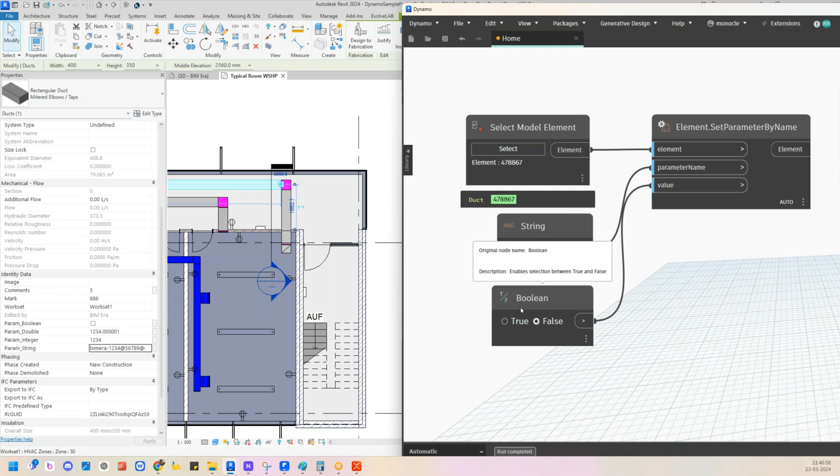Why has it shown a number, like why was it 1 and 0? Very simple - I will be playing with a number as well. For booleans, you have an advantage to control with a number. So 0, it is already 0. Let me set it to 1 and connect this to this. See, it's enabled now. If I make it 0, it is disabled. Very clear. So for booleans I can play with this stuff. I hope you're clear.

Now is this clear, everyone? Guys, is this clear, everyone? Is this clear, everyone, so far? Is this clear? Okay, cool, good.

So let me play with the second parameter, which is like param underscore double. Let me play with parameter double. So it's set to 0. I have set a number here, there's a default number, it's like a 0, but I haven't added any decimal values, nothing to it. But it is added by default. If I say 1, 2, 3, 4, 5, 6, 7, 8.

See, 1, 2, 3, 4.5678. Here it shows it's like 1235, but here it is showing it's like 1234.56780. In the Dynamo we have a setting to control this, in the Dynamo preferences. Let me add that for you - visual settings, display settings, not here.

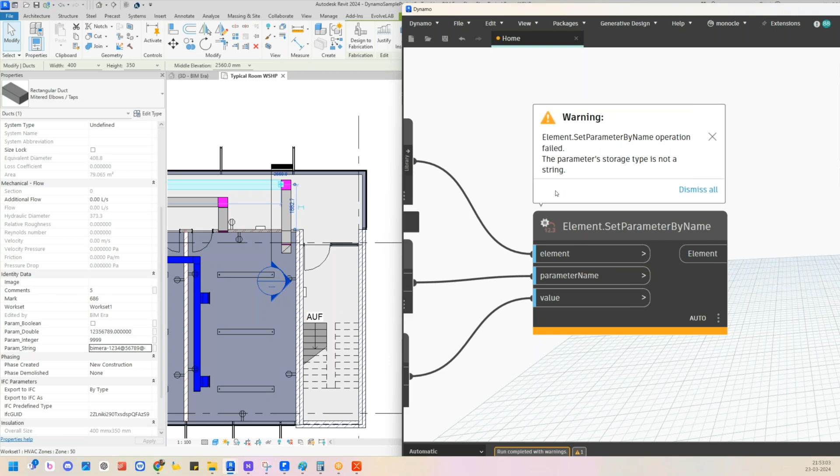So when I hover the cursor on this: Element.Set Parameter By Name operation failed. The parameter storage type is not a string.

So what is that then? It's not telling that directly - it's giving you 50% hint. Array idiot, you have connected something, but you have connected a string when you're supposed to connect something else - it is not a string. The parameter name is expecting something, it is not a string. It's giving you only 50% information. What about the other 50%? It should tell us clearly: array idiot, you have to connect the integer, but why did you connect a string to it?

If it's telling you very clearly, then you become an expert in very less time - you don't even need to join my training. You understand? Because you would be able to understand very quickly. That is saying it's an integer, so we have connected a string - for that reason you are here. If it gave you the direct information, then you won't come and join my training.

Okay, so this is what 90% of the people who are very new to Dynamo get stuck at this warning, and I'm sure you understand. You clear now?

90%, not 10%, 20%, 90% of the people don't understand the data types. That is the reason I have given the complete credit to the data types concept. Why? Because people are failing themselves by not understanding the data types, nothing else. We have other key concepts too, very important, but not more important than data types. They're almost equal to it, but compared to it, the rest of the concepts I would finish in like 2 hours each.

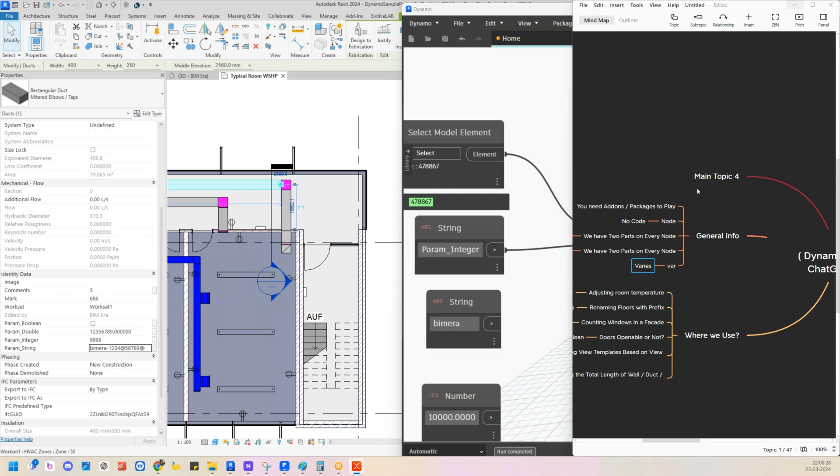So there are two more data types, string, number, and Boolean. Booleans are yes or no, true or false. Remember it just like that.

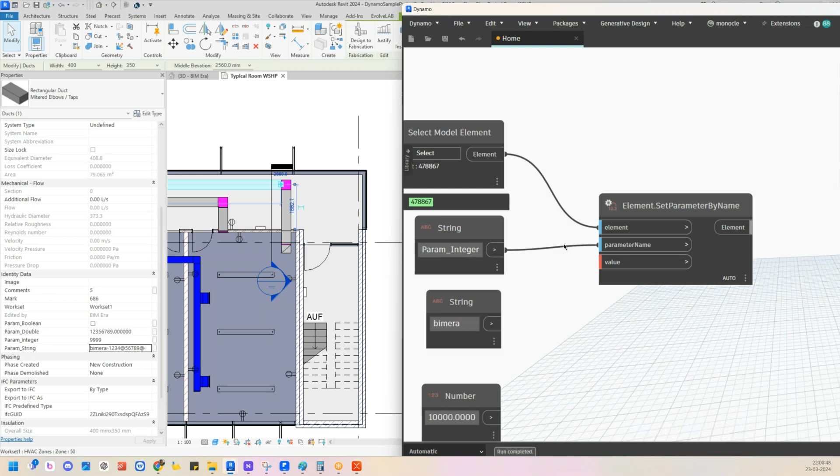Let me play with a param string, and let's jump in. Since this is the first day, I don't think you'll have questions. Tomorrow I'm going to confuse you a lot, but also give you clarity on why, what, and how you have to play.

So WWH, simple. Okay, string. Let me connect Bimera to this. Okay, 1 2 3 4, let's set the value. Let me add special characters.

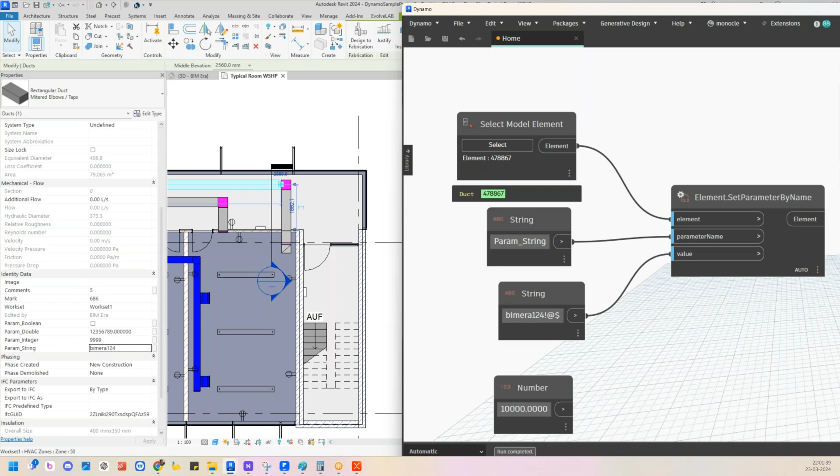What if I connect a number to this? Now this is giving me a warning. Even if I enter 1 2 3 4 and connect this to this, it is accepting the number.

Rajesh told me that string can accept numbers, but when I'm connecting 10,000 to it, it's saying the parameter storage type is not a string. But I connected the same number to the value and it accepted it, but not here. What is the difference, Rajesh?

The way you communicate with it matters. Generally, if you're an electrical guy talking to a mechanical coordinator, and you only know the very basic principles of mechanical stuff, you don't understand the design set of information. When you try to explain something, he can't digest it, he can't understand it. But a mechanical guy can exactly explain the scenario. So the way you communicate, you must communicate properly.

If the parameter string is expecting a string, you have to connect the same data type. Even though I'm entering the same 1 2 3 4, the way I'm communicating, the channel, is different. This channel is a string, so that's a string parameter and it understood. But this time the channel is number, while it's expecting a string to be connected. So there is a difference.

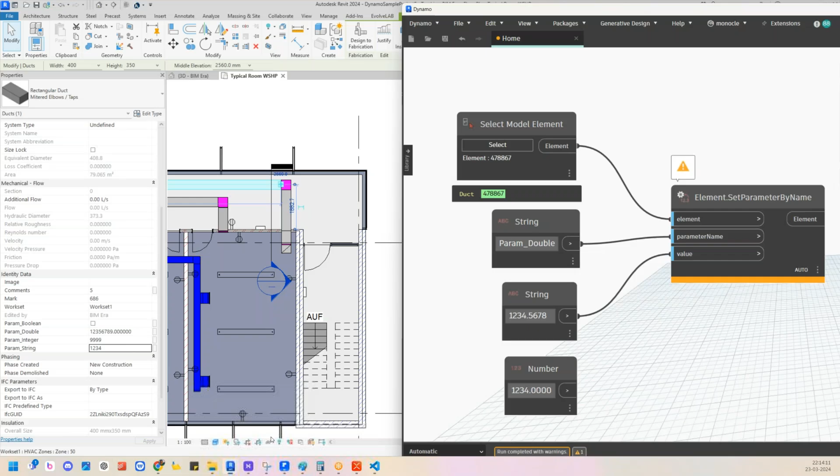Let's just go to the Dynamo. What it said: you have to select this, select model element and element.parameters. It said connect to the element.parameters. Okay, connected these elements - oh, it has given me all the parameter names.

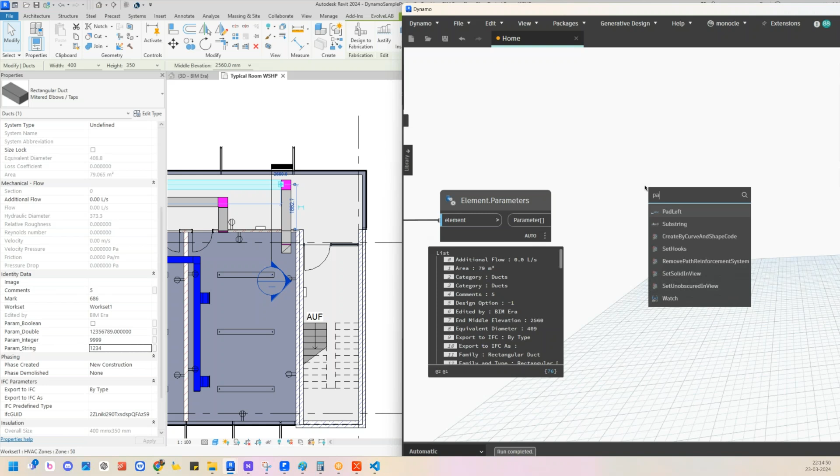Perfect. After that, it told me to use parameter.name. It told me to connect first select model element, then element.parameters, and then parameter.name. When I connect this to this, so there are strings. Okay, perfect, let me copy to clipboard.

Clipboard, send the clipboard to. I would like to convert this.